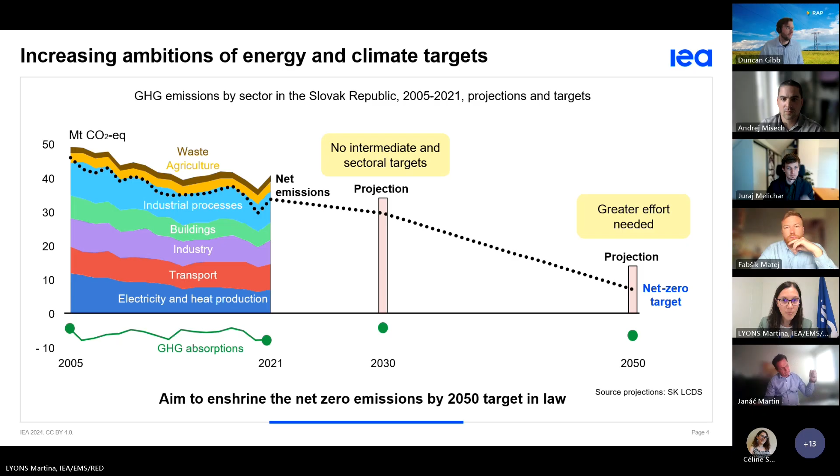So why is that important? Natural gas is a key part of Slovakia's energy mix, making up around 23% of its total energy supply and 8% of its electricity generation. It plays a major role in end-use sectors, covering 41% of energy used for heating and cooling in buildings, and 28% of industrial energy consumption - heating, steam, and feedstock. Slovakia's reliance on imported natural gas creates energy security vulnerabilities.

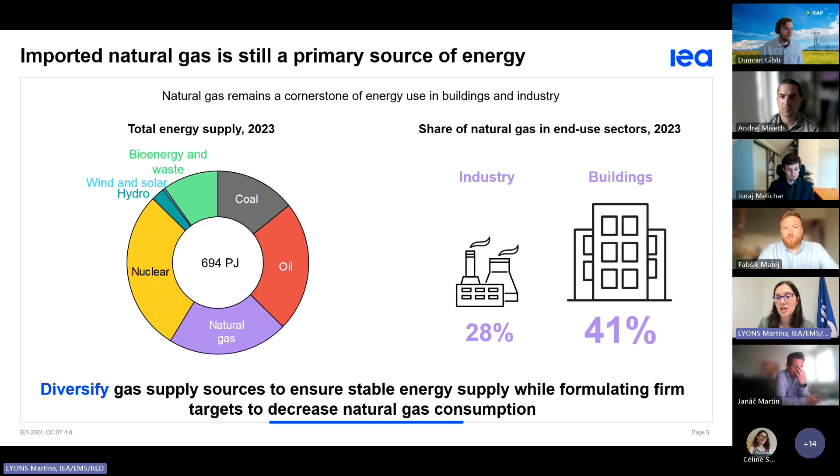Therefore, diversifying gas supply sources is essential to ensure the country has a stable and resilient energy system. This can be done with increased use of renewables, whether it's solar thermal, bioenergy, geothermal, electrification, or even use of nuclear for district heating. Setting clear targets to reduce gas consumption should also be a priority in the country's overall energy strategy.

Slovakia is a quiet leader when it comes to clean energy. Over 80% of its power comes from low carbon sources. Nuclear energy is the backbone of Slovakia's electricity mix, generating around 60% of the country's electricity. The government is doubling down on nuclear, recognizing its critical role in delivering reliable low carbon power. But at the same time, renewables are also slowly gaining ground. Hydropower has been leading the way for years, but Slovakia's solar energy sector has seen a remarkable surge.

It added around 220 megawatts of new capacity in 2023, which came from residential and commercial rooftop systems, which in 2022 was around 60 megawatts. This growth continued in 2024 with 274 megawatts added, and the projection for this year is even higher, around 300 megawatts.

A big part of the boom comes from the Slovak Innovation and Energy Agency's rebate program, which offers subsidies, but this may end in 2026. It also helped to have simplified permitting processes, and due to high electricity prices, it has also prompted some businesses and consumers to invest in solar for cost savings.

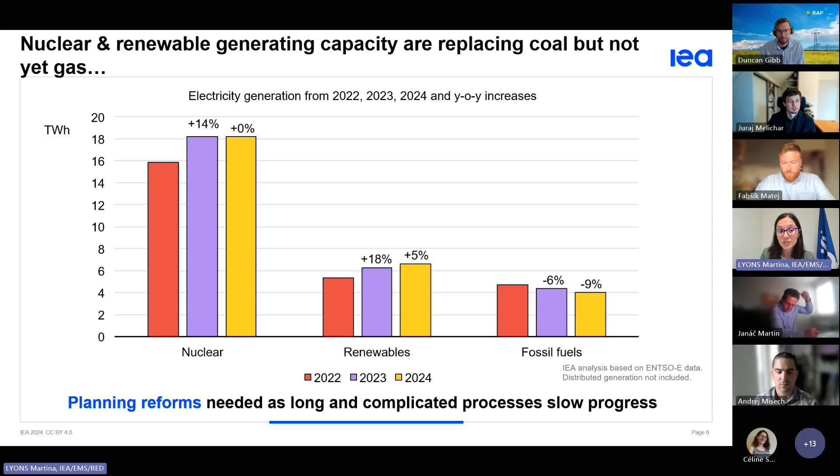So nuclear and renewables are replacing coal, but not yet gas. Why is that? It's because one of the barriers to replacing gas is high electricity prices, which have increased significantly since the energy crisis, being way above the EU average electricity prices.

To encourage replacement or displacement of natural gas with electricity, this is severely constrained by the high electricity-to-gas price ratio, which stood at around 3:1 in both sectors in 2024, for both households and non-household industry. This is actually quite a major decrease from 5:1 for industry and 4:1 for households.

During its review, the IEA found that Slovakia's current carbon taxation doesn't reflect the actual carbon content of fuels, meaning fossil fuels aren't priced in a way that encourages cleaner choices. And this is not just specific to Slovakia, though.

If we want people and businesses to shift to lower emissions, more efficient options, then tax and fiscal policies need to send a much clearer and better signal.

Therefore, a well-designed carbon tax, which reflects emissions, can support renewables, innovation, and efficiencies, and help phase out fossil fuels. I'm saying that because the government actually committed to a fiscally neutral green tax reform, and the IEA encouraged it to move forward with this pledge.

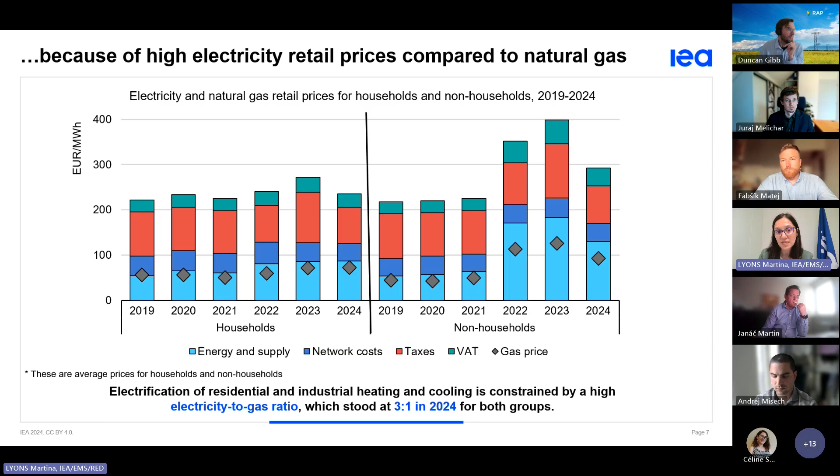When it comes to the building sector, it makes up 39% of total final energy consumption. This is more than any other sector. Energy consumption from space heating makes up 26% of this total final energy consumption.

Over 40% of the demand in residential buildings was supplied by natural gas. This was followed by electricity, bioenergy, and district heating.

When it comes to commercial and services buildings, which are less carbon intensive, they rely mainly on electricity, followed by gas and district heating. I don't want to speak too much about district heating because we have two other speakers talking about it, but it is indeed a widespread supplier of residential and commercial heating in the country.

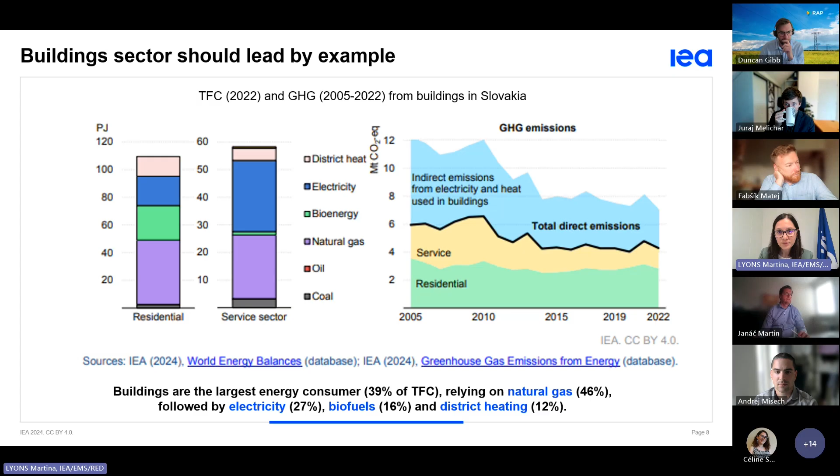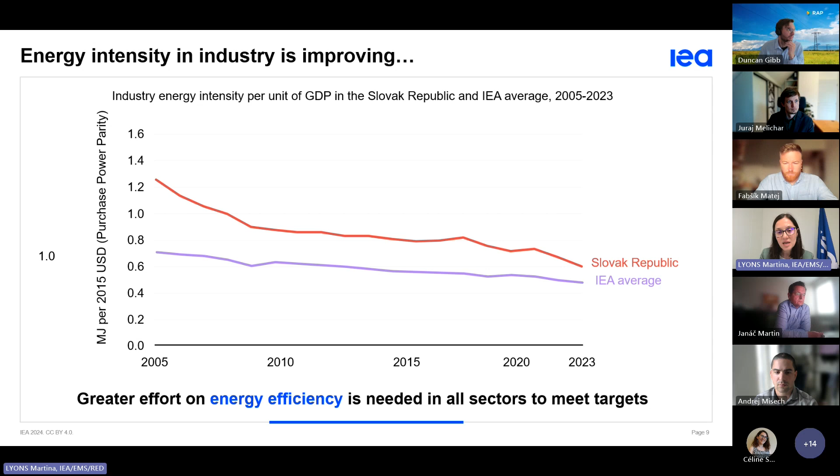When it comes to the industry sector, decarbonizing is equally important for the energy transition as it is for the building sector. The good news is that Slovakia's industry sector has already made some progress, with energy consumption and intensity steadily declining over the past two decades, but there is still untapped potential.

The IEA, in its review, encouraged the government to take a fresh look at all current policies, especially those aimed at decarbonization and renewables, through the lens of energy efficiency and electrification.

Slovakia has undergone a period of deindustrialization, which reshaped the structure of its economy and also contributed to a reduction in energy consumption. But despite this shift, industry remains a big energy consumer, with electricity holding its place as a dominant energy source, but natural gas still plays a key role.

But we noticed that the story lies elsewhere too. Biofuels and waste have been the fastest growing energy source in industry, pointing to gradual diversification and a move toward cleaner alternatives.

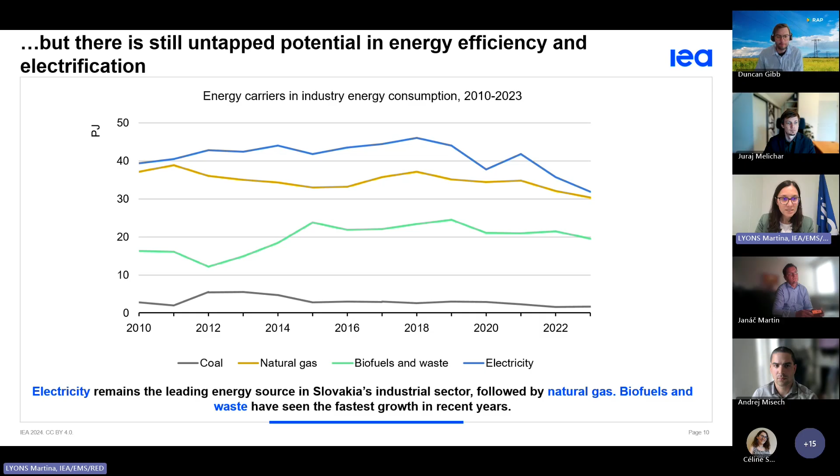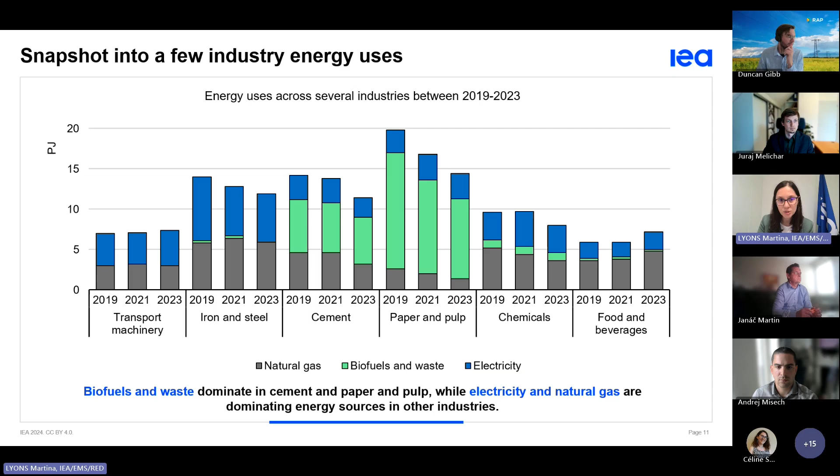On one of the latest slides, it's just a quick snapshot into a few industries and their energy use. The majority is electricity use, followed by natural gas, while biofuels and waste are dominant in the cement and paper and pulp industries.

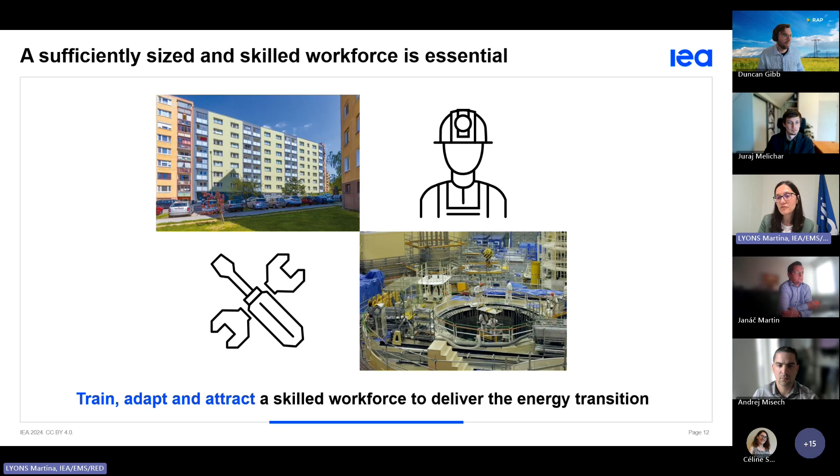In my last slide, I would like to close with saying something which goes beyond technologies and policies and focuses on people. The energy sector is already feeling the strain of a tightening labor market in Slovakia, and the shortage of skilled workers is growing. The government has launched initiatives to tackle these gaps, but what is needed is a more systematic approach, particularly to reskill existing workers, train young people, and attract skilled talent. Investing in people today is essential to deliver any energy system of tomorrow.

These slides offer just a snapshot of Slovakia's in-depth energy report from the IEA, which highlights some strengths, some challenges and opportunities. Thank you, and I look forward to other presentations and to the Q&A.

Thank you very much, Martina. This is definitely a very useful overview of the energy sector in Slovakia and the situation. Now we would go with the second presentation, looking more specifically at the heat pump market in Slovakia.

It will be given by Duncan Gibb, who advises on technologies, policies, and data needed to switch to clean heating. He works at the Regulatory Assistance Project, and he leads their European work on the economics of heat pumps, and has published papers on economics and policy, the Renewable Energy Directive, and cold climate heat pumps. He joined RAP's Europe team in 2022 with more than 10 years experience in energy research and policy analysis. So I give the floor to you, Duncan. Looking forward to your presentation.

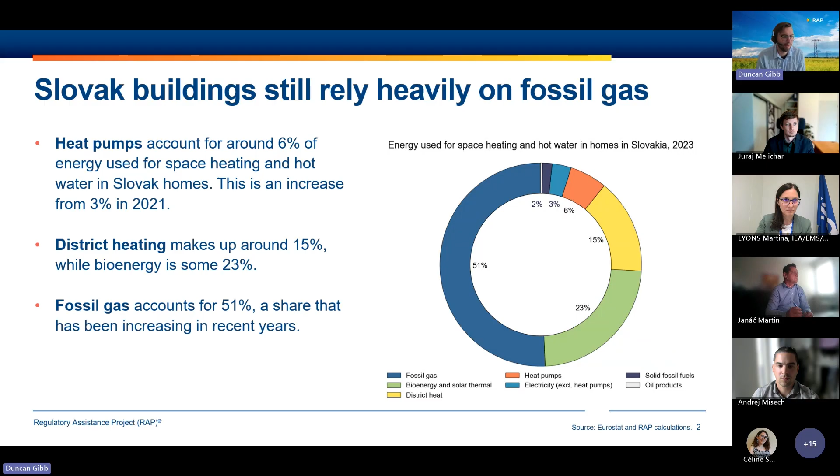Martina talked about this already a little bit, but just to remind you that the Slovak heating sector in residential buildings for space heating and hot water is still heavily dependent on fossil fuels, especially fossil gas and natural gas. We see a slightly increasing role for heat pumps over the past few years in terms of share of final energy in space heating and hot water, but it's starting from a small base, and a bulk of it is still taken up by district heating and by bioenergy as well. We will have some presentations on district heating today too, which I'm very much looking forward to. We've also seen the share of fossil gas increasing slightly in the last few years.

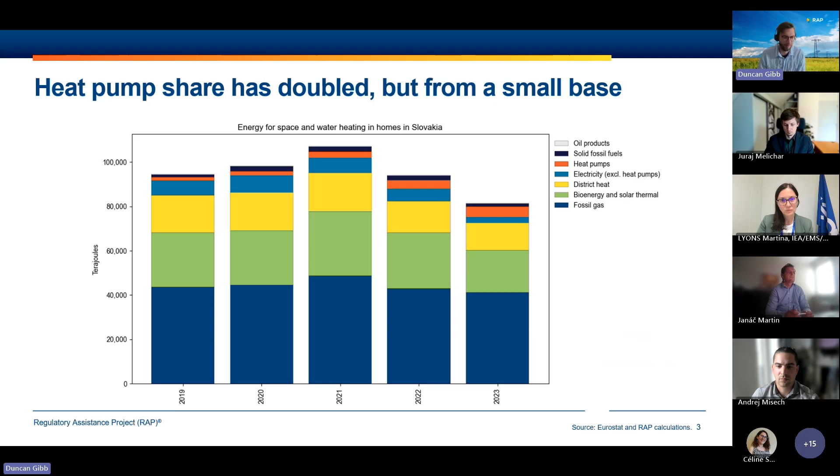Now let's talk more about heat pumps, because this is a lot of what I work on. We have seen a big boom in the heat pump market in Slovakia during 2022. Many of you listening know the reasons why: the Russian invasion of Ukraine, the spike in energy prices, and a big turn across Europe towards heating with heat pumps. This is the case in many European countries, where we saw a big increase in the market in 2022. In the case of Slovakia, it grew by about 2.5 times, and then it started to fall back in 2023. We don't have the Slovak data for 2024, but we can say that across Europe, it has fallen quite significantly.

So this is sort of the context for what I'll talk about today. About a year and a half ago we published a study on the heat pump policy framework in Slovakia. This was based on a toolkit we've published two versions of, in a consortium with Agora Energiewende, CLASP, and the Global Buildings Performance Network, looking at a policy toolkit for global mass heat pump deployment.

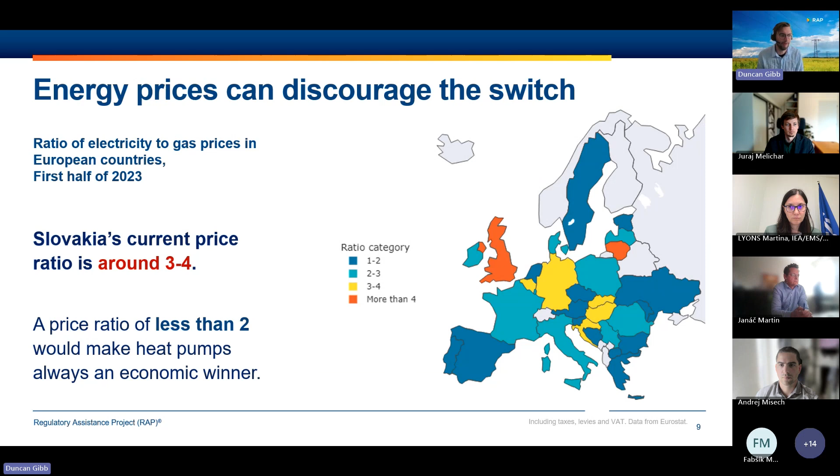So one thing we looked at in this paper, a big message from our paper, is the need to shift these taxes and levies away from electricity and onto gas. Now I'll show you a bit of this analysis to finish my presentation.

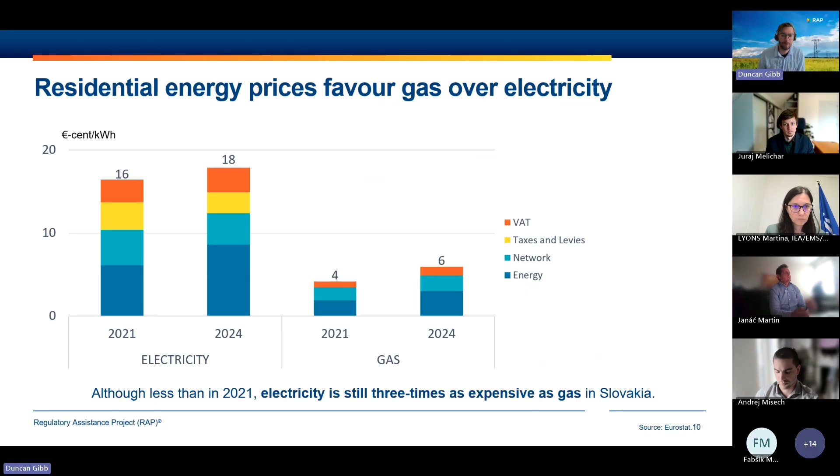You don't want to be placing more government taxation on a cleaner fuel, a fuel you want to be using to decarbonize your heating and lower pollution. This is not ideal, yet it still is the case in Slovakia and many other European countries.

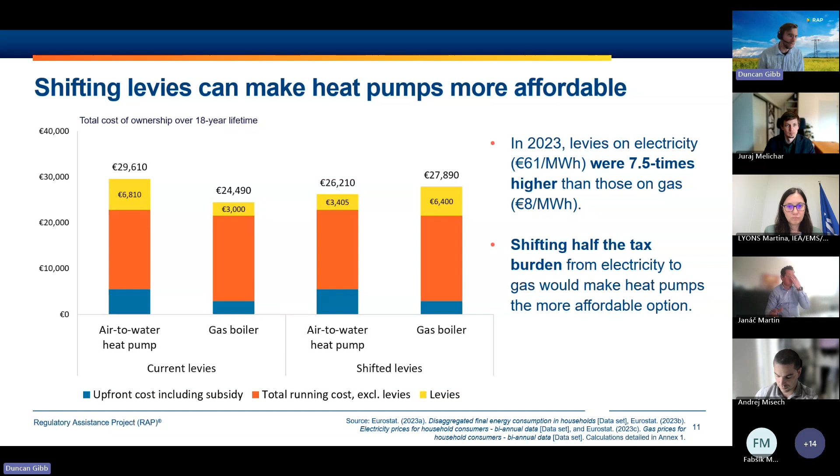One is to communicate with the public. It's really important that people understand the renewable heating technology options. I'm not only talking about heat pumps, but also solar thermal for hot water, district heating. It's really key that households understand these technology options, understand the support available to them and how to access it, and build trust in the technology, because we still hear a lot of myths about heat pumps and other technologies that are simply not true and are pervasive in society, undermining confidence in the technology.

Another one, as just discussed in the previous slide, is to rebalance electricity and gas prices. This is key to make sure that if you're spending a bit more money to invest in a heat pump, which is likely the case because of the upfront cost, you're able to recover that investment in a short period of time.

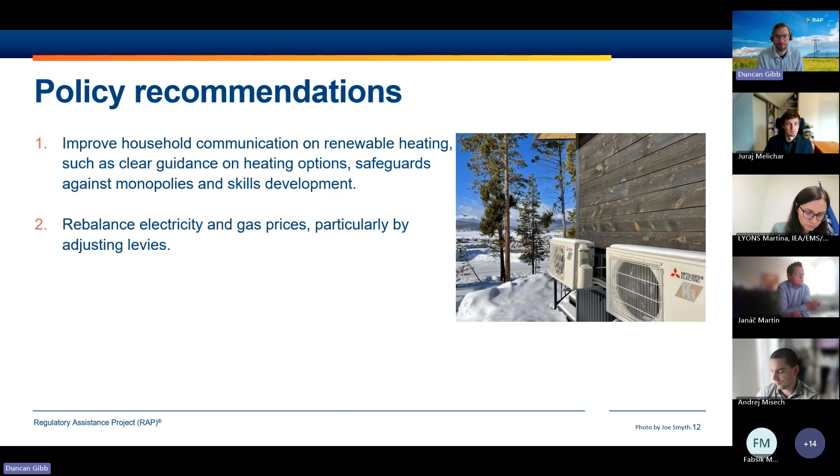Also, we want to make sure that policy support for heat pumps is stabilized. This 8-month gap in funding has been problematic for public perception of support for heat pumps, and it's likely that the support needs to be increased as well, based on the market in Slovakia.

Finally, consider some regulation on the sector, which would be restricting gas boilers in new buildings, largely in line with the Energy Performance in Buildings Directive. Or consider something like a clean heat standard, which would gradually mandate the sale of heat pumps from heating companies - or not just heat pumps, but any clean heating technology - to gradually phase out the sale of gas boilers for new and existing buildings.

So these are 4 of the recommendations I wanted to highlight today in the context of building up a heat pump market in Slovakia. I'm happy to stay around for the panel discussion, and hope that was interesting to everybody. Thanks again to Andrej for the invitation.

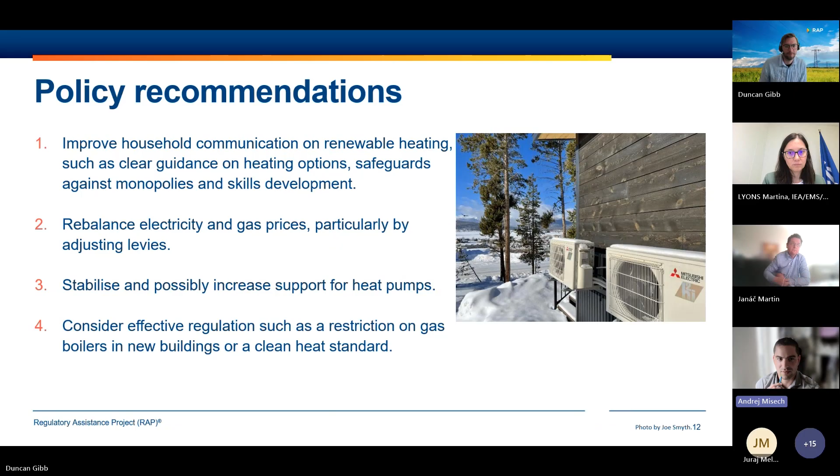Thank you very much, Duncan. Definitely super useful that you included the policy recommendations, and for me personally, the shift for levies point was particularly interesting - something to think about, hopefully.

For the next presentation, conscious of time, we would now go to more practical deployment of technologies in Slovakia. We have Mr. Martin Janáč, who will give a presentation on the transformation of district heating systems in Slovakia.

Martin Janáč has been working mostly for various international companies in the energy sector or their operations in Slovakia. The main focus was on district heating networks, which obviously have a long tradition in Slovakia but need to be transformed into a modern and environmentally friendly solution. During his career, he has been involved in several important district heating transformation projects, from construction of an innovative energy center in Rimavská Sobota using combined heat and power, biomass and photovoltaics, to a unique project installing 18 combined heat and power units in the largest housing estate in Central Europe, Bratislava's Petržalka.

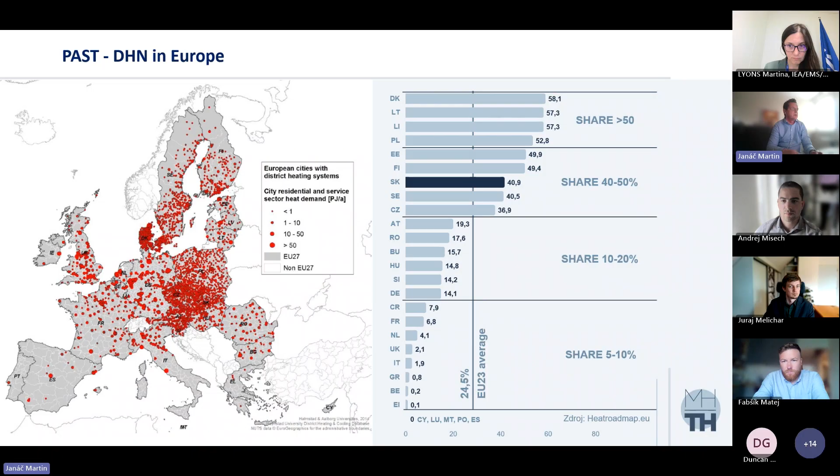Concerning the market in Slovakia, we have district heating networks in nearly every city, supplying heat to nearly 1.8 million inhabitants. The market is quite fragmented with 350 licensed companies, and heating supplies are decreasing. For example, in the last 10 years there was a decrease of more than 25%, mainly due to energy efficiency measures of consumers, but also of heat suppliers.

As stated in the previous presentation, the major fuel in Slovakia is natural gas with a share of more than 50%. This is due to the fact that Slovakia was the major transit country for natural gas to Western Europe. For renewable energy sources, the main part is biomass with a share of nearly 23%.

Concerning price regulation, prices in Slovakia are strictly regulated by the regulators. On the market there are several international players like Veolia, Engie, or Stefe, which is an Austrian company, but also a state-owned company now called Teplárenský Holding, where I worked, which regroups the district heating companies in major cities.

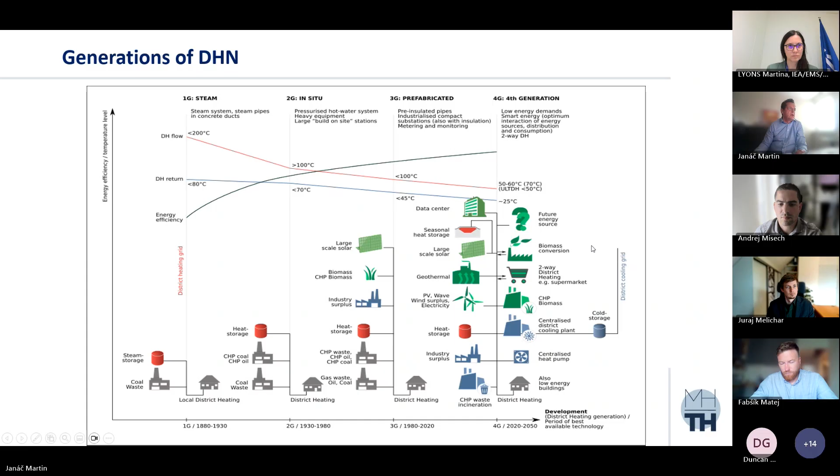This will be done by the development of renewable sources, which are mainly based on biomass, geothermal energy, and waste heat from industrial production.

One part will also be the integration of waste-to-energy plants into district heating networks. We are already using this waste heat from these waste-to-energy plants in our two biggest installations, but we plan to increase their share.

Further development we see also in high efficient combined heat and power, which is in fact a flexible tool for the stabilization of the electricity grid as a consequence of renewable energy installations into the grid.

We can observe on the market that with the installation of renewable sources, there is a big fluctuation in prices of electricity, and district heating networks with combined heat and power can bring the stabilizing factor to these tendencies, and can very well complement renewable energy production.

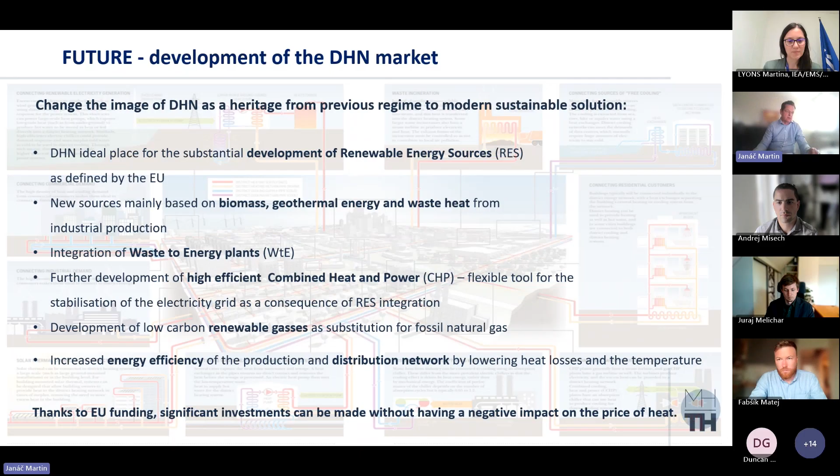So just a few words about our company, MHT Teplárenský Holding. MHT Teplárenský Holding is quite a new company, which was created only in May 2022 by the merger of six biggest

state-owned district heating networks, and is nowadays operating as a single company. The reason for the merger was mainly to make the operation more effective, to centralize some services, and in the end to optimize and reduce the price of heat for final customers.

These are just a few figures about the different sites that we operate. Just to have an idea, MHTH supplies nearly 2,400 gigawatt hours of heat and 600 gigawatt hours of electricity. The total length of the distribution network is more than 500 kilometers.

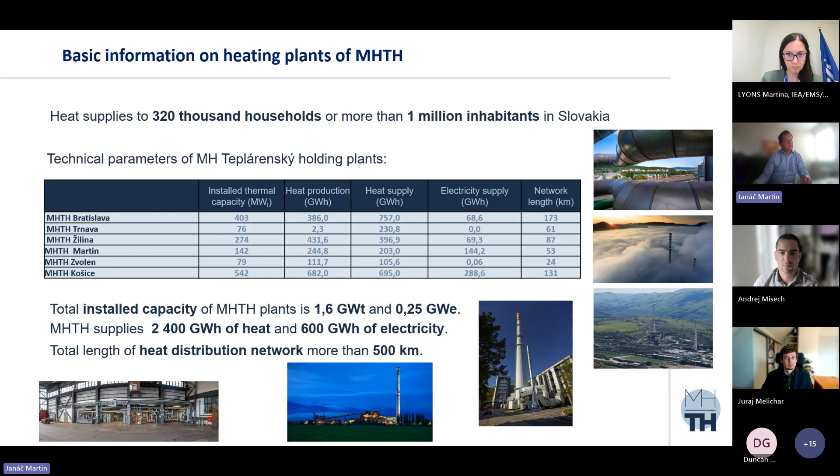Coming back to legislation, European Energy Efficiency Directives define for us the goals, defining the so-called efficient, or maybe better said, sustainable district heating network, where the share of renewable energy sources or waste heat is defined, and these minimum shares are getting stricter and stricter.

There is the possibility to use also the heat from combined heat and power until 2040, in combination with waste heat and renewable, but at the final end to arrive in 2050, where only renewable heat or waste heat can be used.

Member states may also, based on this EU directive, choose an alternative criteria which defines the amount of greenhouse gas emissions from the district heating and cooling system per unit of heat or cold delivered to customers. So nowadays the threshold is under 200 grams of CO2.

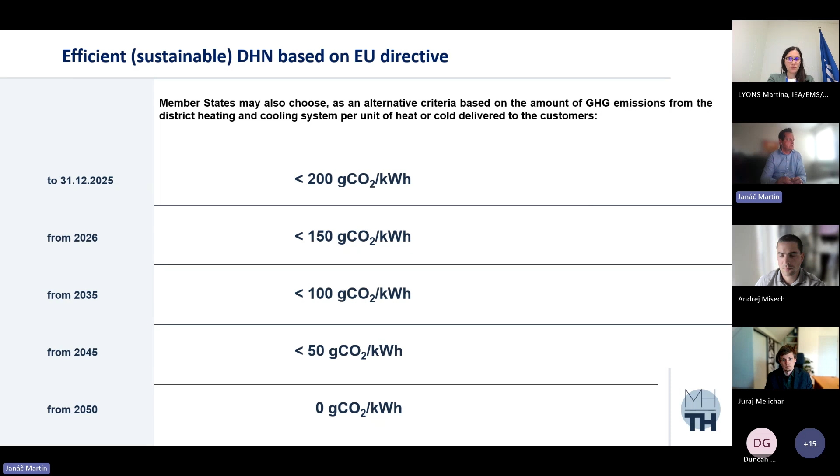And the final goal is to have zero emissions in 2050.

Concerning concrete projects that are already realized or planned in our operations, I have it broken down by different sites, because there is no single silver bullet solution to these challenges. Heat is a local topic, and every city has a different context and also a different solution which can be adapted.

So for Bratislava, we plan to continue with CHP production from natural gas, maybe in the future replaced by low carbon gases, and increase the share of heat from the waste-to-energy plant.

Trnava is a specific case where we use emission-free heat from a nuclear power plant. On this site, we are using less than 5% of natural gas as a backup solution in case of maintenance of the network.

In Žilina, we are still using coal in this plant, but in a few months and next year it will be replaced by natural gas combined heat and power. We are also considering the use of a multi-fuel boiler which can use wood chips, so biomass, or RDF, which is treated waste.

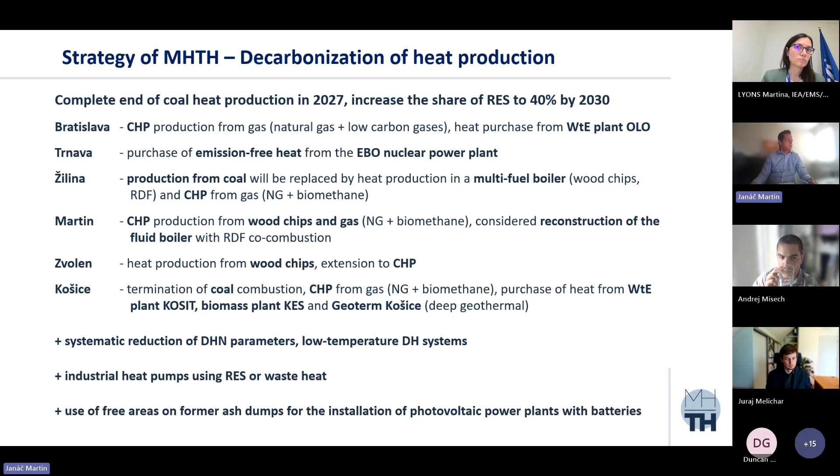Finally, the Košice plant, which is also our biggest site, located in the eastern part of Slovakia, where we are still using coal, but we invested in gas CHP, and we plan to increase the share of waste to energy from the Kosit company. We are still buying some heat from a local company, and we have a big project, Geoterm Košice, which I will describe in my next slides.

The second part will be from burning sustainable biomass, which will stay at, let's say, a constant level. The drawback of using heat pumps is that from an electricity producer, we will switch more to an electricity consumer.

But we see the opportunity, especially in the flexibility of operation, where we have the possibility to switch between CHP production of electricity and using heat pumps in periods where the price of electricity is low, even negative. We could use heat pumps to produce cheap heat. But at the same time, when the peaks of electricity happen, when renewable electricity is not produced, we can switch back to CHP production and benefit from the highest prices in order to have a competitive price of heat.

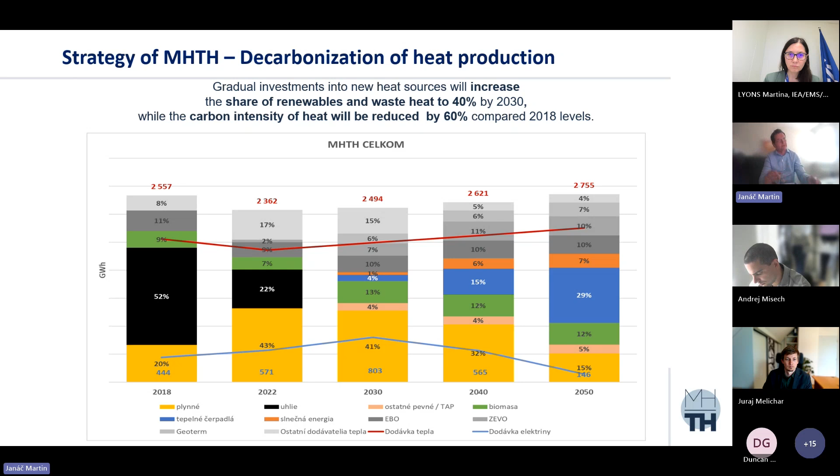The plant in Bratislava is comparable in size to the Košice one, but we are producing much less electricity because we are buying a lot of heat from external producers. The difference to the Bratislava site is that in Košice we are supplying most of the heat to an external distributor, a municipal distribution company, which then supplies the heat to final customers.

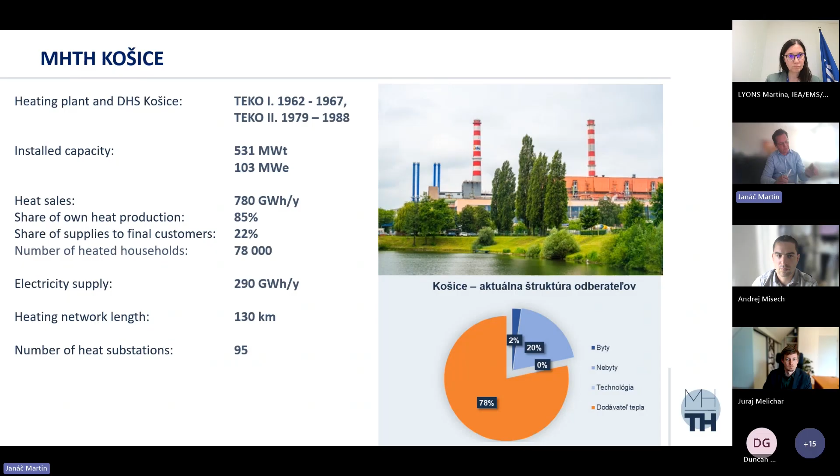So coming to the Geoterm project: the positive thing is that the reservoir in the Košice basin is considered one of the most promising in Central Europe, with an estimated potential of 200 megawatts.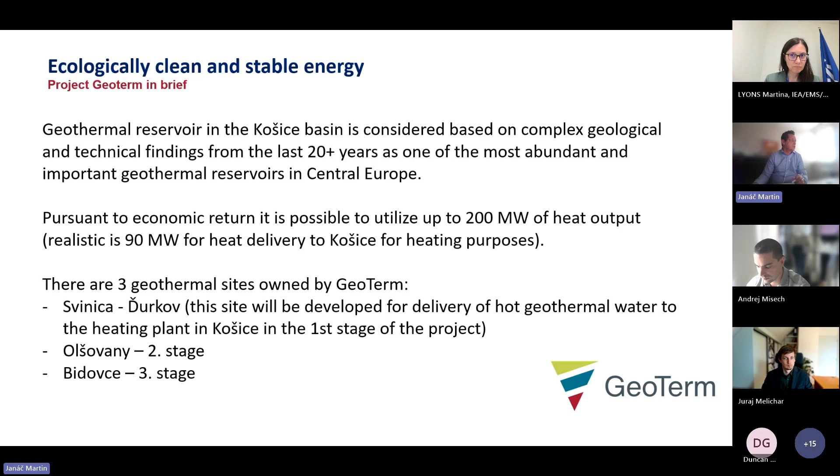But for our project, we see a realistic maximum at the level of 90 megawatts of heat delivered to Košice city. There are 3 geothermal sites owned by the Geotherm company, which is an SPV company dedicated to the production, exploration works, and underground work. The sites are in Svinica, Ďurkov, Olšovany, and Bidovce.

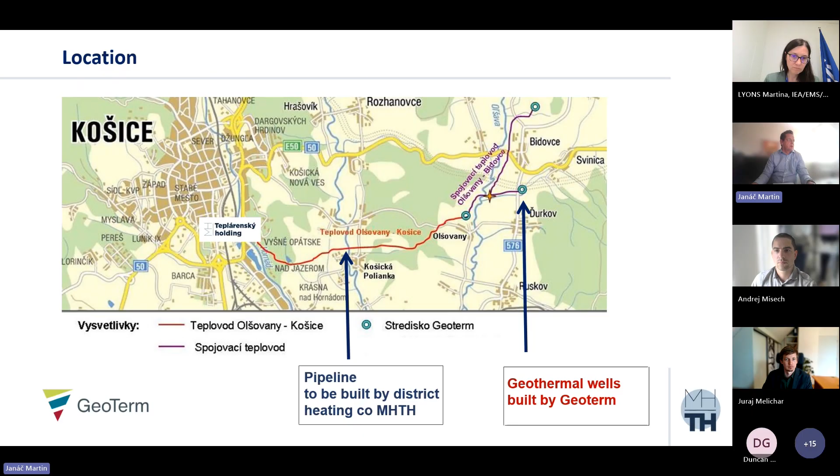Geothermal wells are built by the SPV company Geotherm, so we will have a long-term agreement with this company for buying heat from their production. So for the project at its current stage, we have all the permissions needed for construction. We have a valid EIA.

We have also the legal company Geotherm, which has legal title to all land for the planned 3 geothermal sites. And we have also managed to have the agreement of all the landowners where the pipeline will be built, and we have all the building permits relevant and valid.

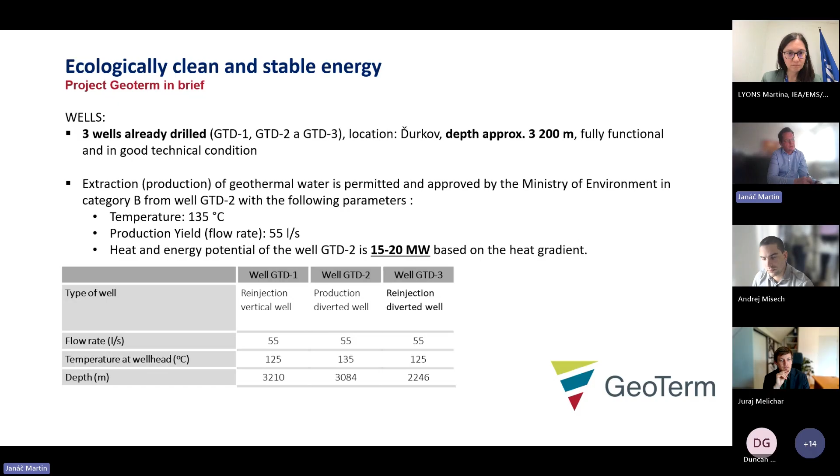Few figures about the wells. There are actually 3 wells already drilled at the location Ďurkov with approximately depth of 3,200 meters. These wells are 2 reinjection wells and 1 production well. In the first stage of the project, we plan to build 3 other wells of one production well and 2 reinjection wells, and this will be then with the capacity of roughly 30 megawatts, with the potential to increase to 90 megawatts in total.

The goal of the project is delivering clean heat from geothermal wells to district heating of Košice. As I said, 30 megawatts, possible to upgrade to 90 megawatts. It's a strategic project for us to decarbonize the heating in Košice and completely stop the production from coal until 2030.

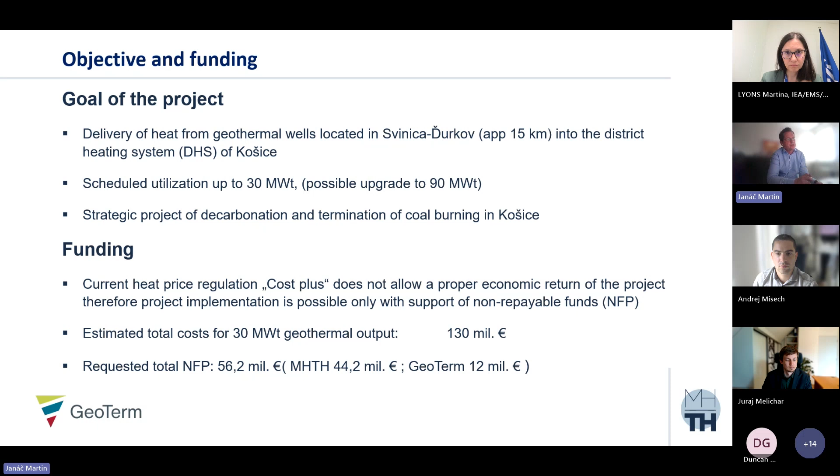The estimated total cost for the first phase of the project is roughly 130 million. We have already obtained financing from the Just Transition Fund of EU funding at the level of 56 million, which is distributed for the network from our side, MHTH, and for Geotherm for the drilling of 3 additional wells.

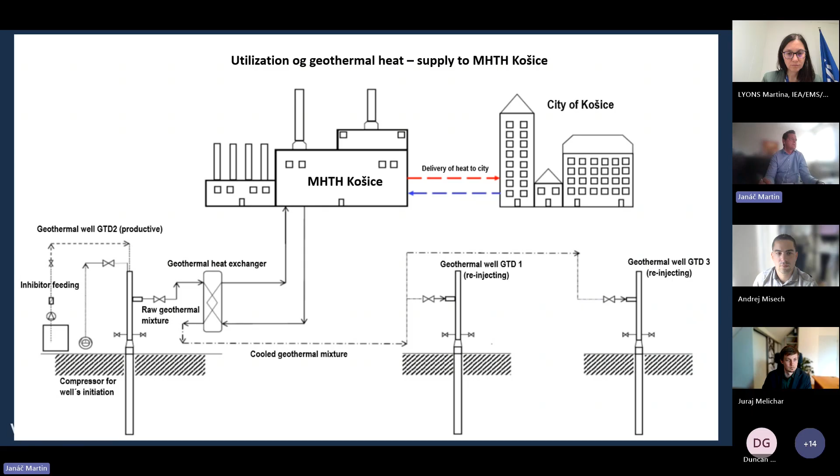This is a small scheme where the reinjection wells and the production wells are displayed. The circuit with geothermal water is closed, so we have the exchanger which will use the heat, then different water will circulate in the pipeline to bring it to our side in MHTH Košice, and then we will use our network in the city to distribute it further to citizens in the city of Košice.

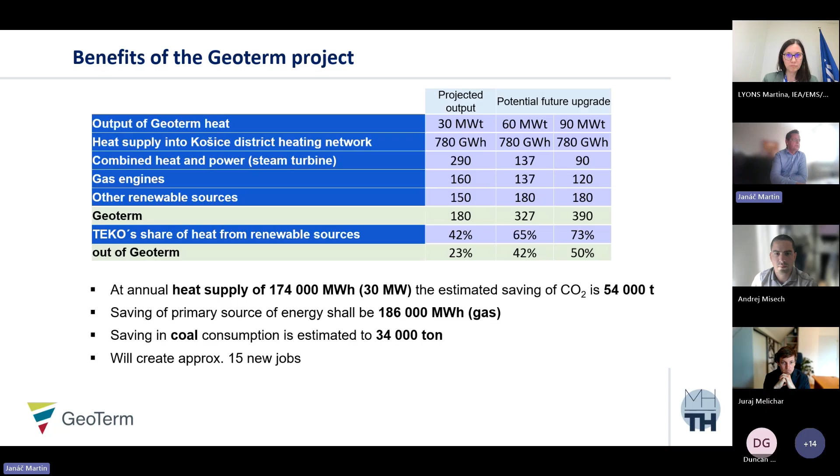These are the few figures with the project output for the 30 megawatt, 60 megawatt, or 90 megawatt alternative. We can see on the 2 last lines that depending on the alternative, the share of renewable heat can increase from 42 to 73%, out of which 23 to 50% can be directly supplied from Geotherm.

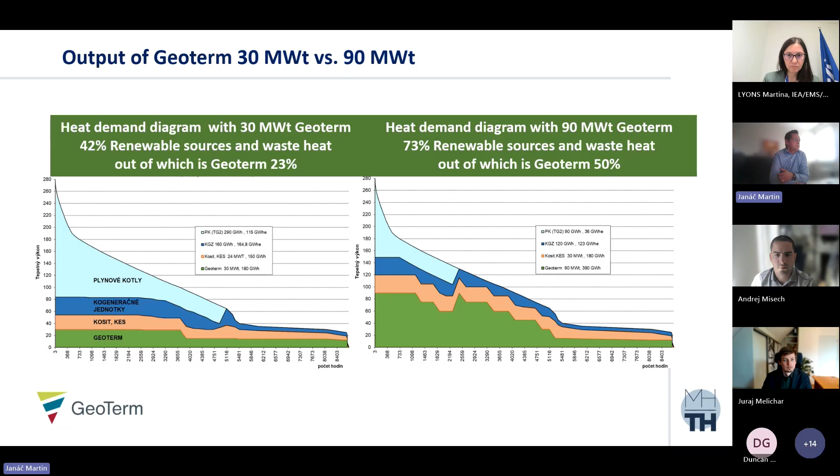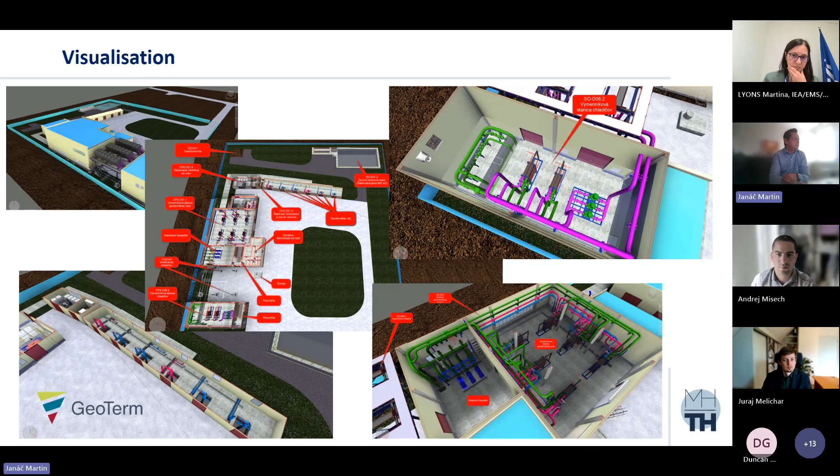And yeah, this is my last slide. So it's very difficult to predict how the future will look like in 2050. Also, Marty McFly, when he was traveling in the future, he was traveling, in fact, to 2015, which we already passed, and the imagination of that time didn't fulfill 100%. So it's very difficult to say how 2050 will look like, but I'm sure that district heating networks will play a key role in the supply of heat to citizens, and we have all the cards in our hands, and we have to do our best to maintain this technology also for further generations. Okay, that's it, and thank you.

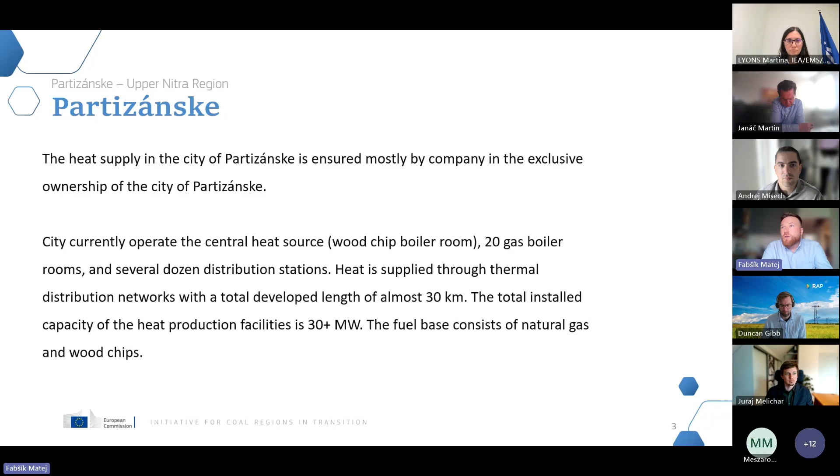Also a huge problem for now is that the system is strictly decentralized. That means we have more than 20 boiler rooms in the city - smaller district heating systems - and more than half of these boilers are in a state of disrepair, meaning they can maybe produce heat for not more than 5 or 10 years. So we don't have much time, and we need to focus on reconstructing this system.

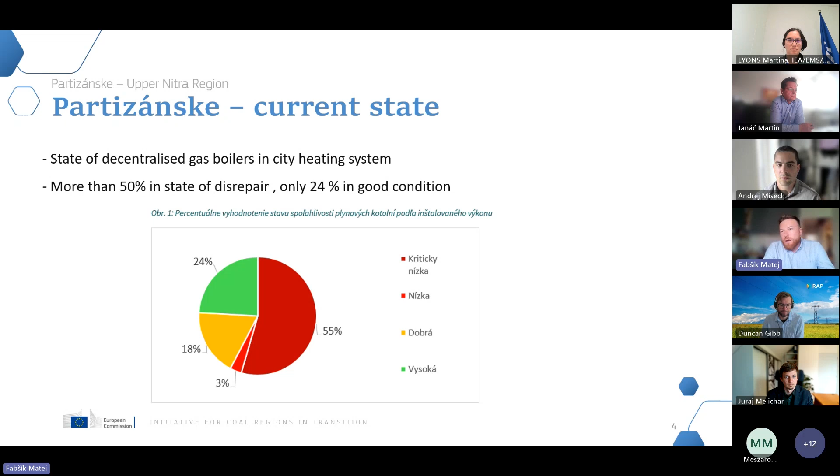Only a quarter is in good condition, but we have some kind of solutions. I'm also part of Friends of the Earth NGO, which is supporting the city. I'm not part of the city, but we are supporting it, preparing feasibility studies and plans for how to decarbonize effectively and how to keep the price sustainable and competitive in the city.

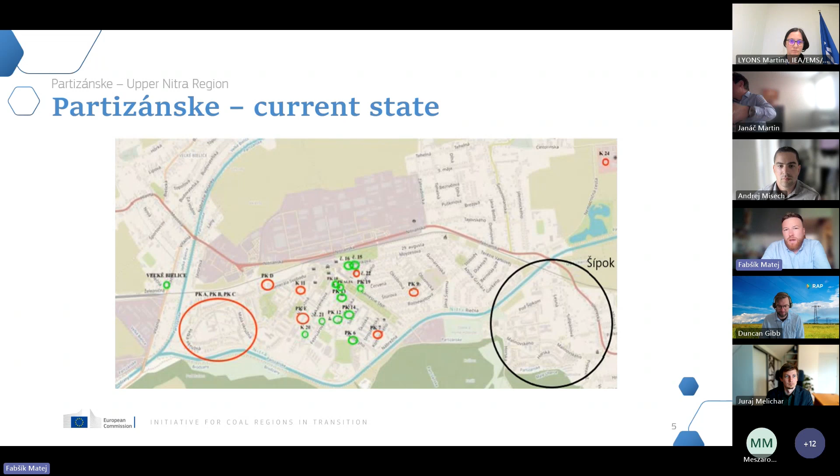If we think about how we can produce heat when it is most advantageous, not just when it is needed, we definitely need to interconnect these systems, because we have overcapacity in biomass in one part of the city - more than 5 megawatts - and nowadays we have less than 25% of heat production from biomass. So if we take the first step and interconnect the systems, we can achieve more than 60 or 70% from biomass.

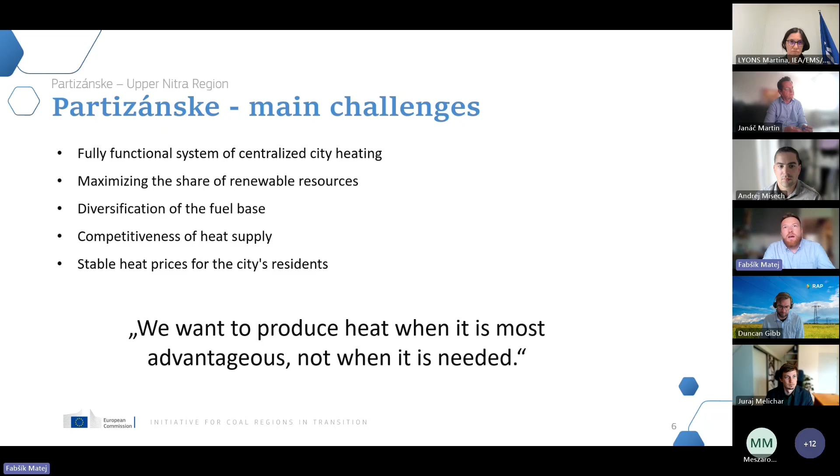But we have another advantage too, similar to Košice, but not so hot. We have 2 geothermal drills, and one is not so deep - one is 33, and the second one is 23 degrees Celsius.

And that means that we definitely need heat pumps to heat the temperature and utilize it into the system of district heating, because we are planning the 4th generation centralized system, and it means the maximum temperature at about 65-70 degrees Celsius. I think it's a good opportunity to have also this kind of geothermal energy.

We have a lot of activities planned about geothermal energy, but we are still waiting for the ministry, because we are also part of a coal region, part of the Just Transition Fund area, and we are waiting only for results. We have applied for research activities for geothermal energy, and we are now waiting 6 months only for results, planned somewhere in February. So the really big problem is bureaucracy in Slovakia, and we need to focus on this too, but I don't know exactly how.

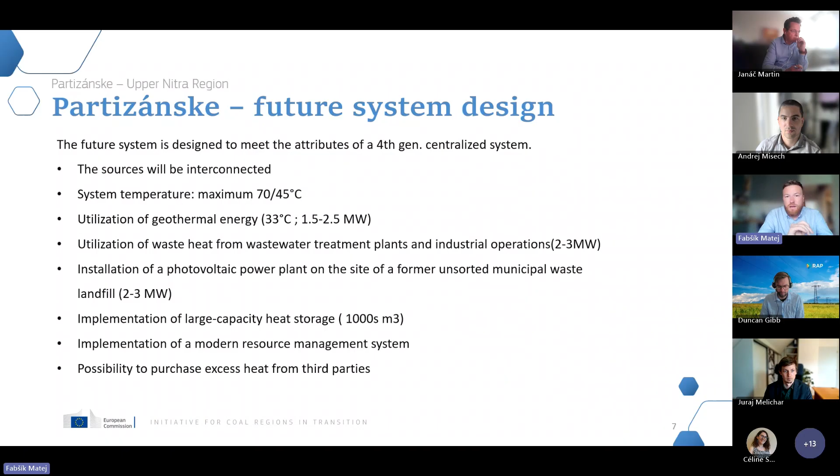We are planning the geothermal energy also as a base load, so it's logical, I think, and we want to store the heat, as I said before. We are planning to build a medium or large capacity heat storage, more than 1,000 cubic meters, and that means we can really cut the peaks during the day, and we can make more than 50% from geothermal energy that is not more than 2 megawatts. We can make this in the city because it will be a base load with also heat storage, with huge or industrial heat pumps. We can make this kind of mixture.

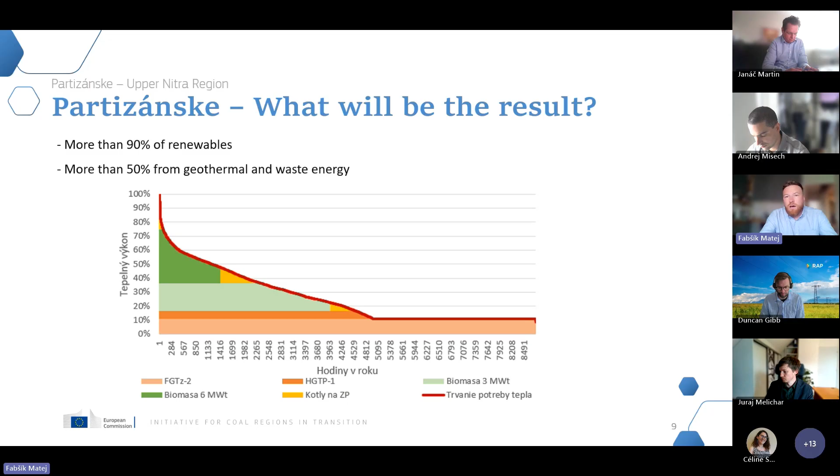We have a similar project with Žilina University, a research activity in a wastewater treatment plant, and we are also planning in the future to utilize waste energy from industrial processes, mainly from the wastewater treatment plant, because we have stable temperature on the outflow, and that means it could be utilized mostly during the winter, with quite hot water if we use heat pumps for wastewater treatment, utilizing the wastewater into the system. During the summer we will probably use the river water, because its temperature is more than 5 degrees Celsius hotter than the wastewater.

And what about the financing, when and how much? I think the first phases could be done within 5 or 10 years, depending on funding, ministry, and bureaucracy, and also depending on budget, because this kind of solution is still more than 20 million in total.

But we are trying to focus on every opportunity we have. We are now successful in the EU City Facility Program, successful in the target program from the European Investment Bank, and we have strong communication with partners in the European Urban Initiative. So we are also focusing on direct funds, not only Slovak regional funds, and we hope that co-financing will be somewhere around 50%.

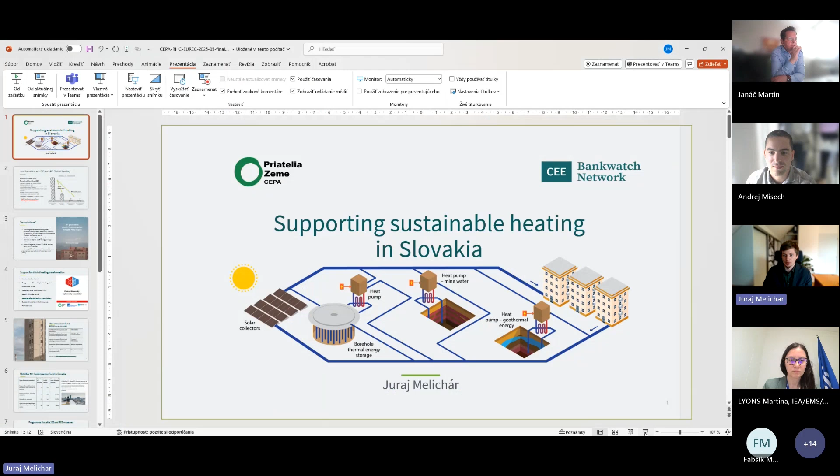Maybe I will start with the fun fact that Peter von Rittinger, one of the constructors of the first heat pump, studied in Slovakia, in Banská Štiavnica. So I think sustainable heating is very much connected also to Slovakia, and we would like to see really also to reinvent this tradition.

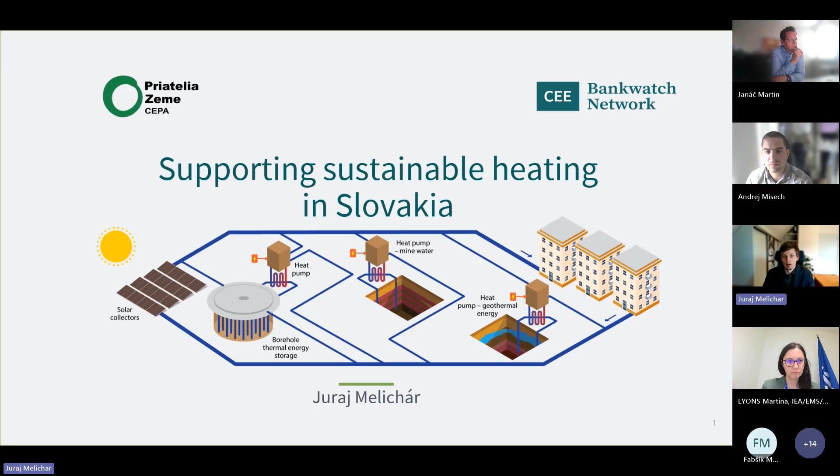We started working in Friends of the Earth on sustainable heating around 2018, when it was one of the preconditions for just transition, or basically decommissioning of the coal power plant Nováky in the Prievidza just transition region, where the town Partizánske is also situated.

We prepared a comparison of the third and fourth generation district heating, where you can see on the right side that the coal power plant Nováky, which was decommissioned in December 2023, had a certain amount of annual CO2 emissions. One of the best solutions we have in Slovakia was to decrease, with approximate business-as-usual solutions leading to a 73% emission decrease. Our pre-feasibility study showed that with much more energy efficiency of buildings and modernization of the district heating network, there could be a fourth generation district heating system with 97% less emissions.

Nevertheless, Prievidza now has the largest heat pump in Slovakia, using underground mine water. It's 4 megawatts and it's heating the town. There is also a thermosolar system for preheating the mine water, which, as I heard, is more efficient than they predicted, and they are more happy than they used to be when they were planning it in advance.

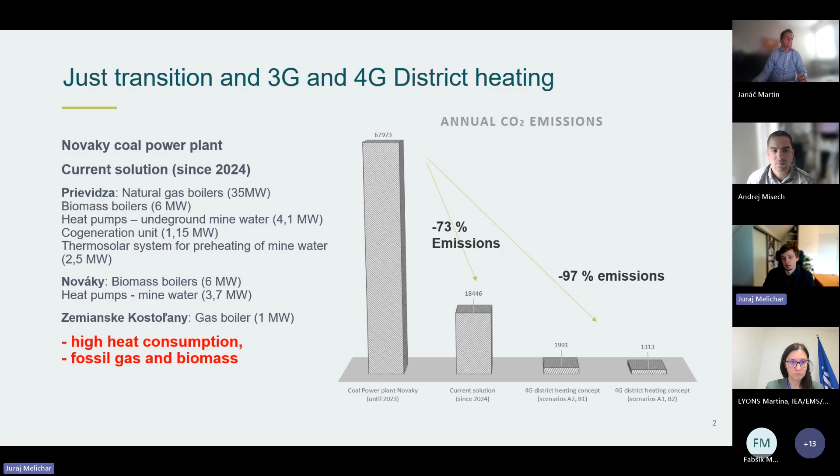There is still a lot of fossil gas and biomass in the system, and also in the whole country system. Therefore, we really recommend a second phase, which shows that modernization of the heating pipelines still has another 11% energy savings potential, and renovation of buildings in the town of Prievidza shows further energy savings are possible. To sum up, in theory only 46% of the heat would be needed with a low temperature district heating system, compared to the very inefficient coal power plant district heating system, which was very big, with for example 12 kilometers of heating infrastructure to those cities.

So this was our initial work, and then we started focusing more on Partizánske because there was much higher potential and willingness to make further steps.

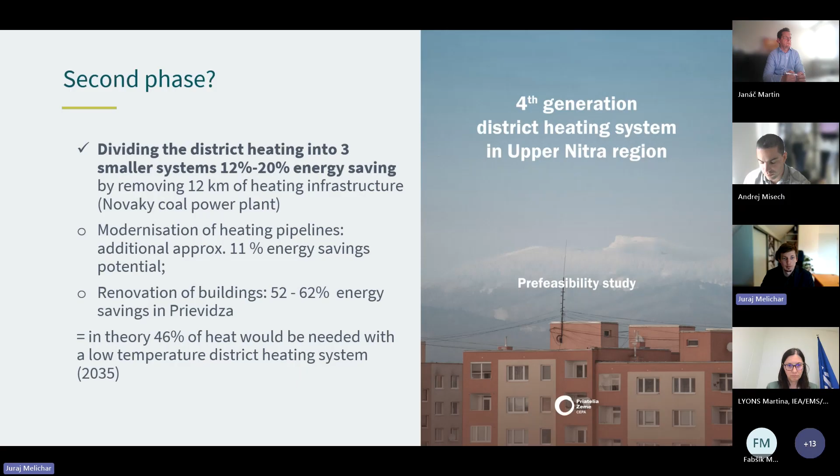Our work also concentrates on identifying and improving opportunities in public financing, mostly EU funds. For example, approximately 15 billion euros are allocated to decarbonization of energy in this decade by 2030. The Modernization Fund, Program Slovakia, including the Just Transition Fund, and the Recovery and Resilience Plan also have some measures, for example passportization of geothermal wells. There is a Social Climate Fund with a possible allocation of 1.6 billion euros, which hopefully will be approved with the ETS2.

With the Czech Technical University in Prague and the Center for Transport and Energy in Czechia, we started the Czechoslovak Heating newsletter, so I would like to invite people to subscribe to receive some news. Our NGO is also supporting pilot initiatives, for example in Partizánske and other towns and cities where it makes sense.

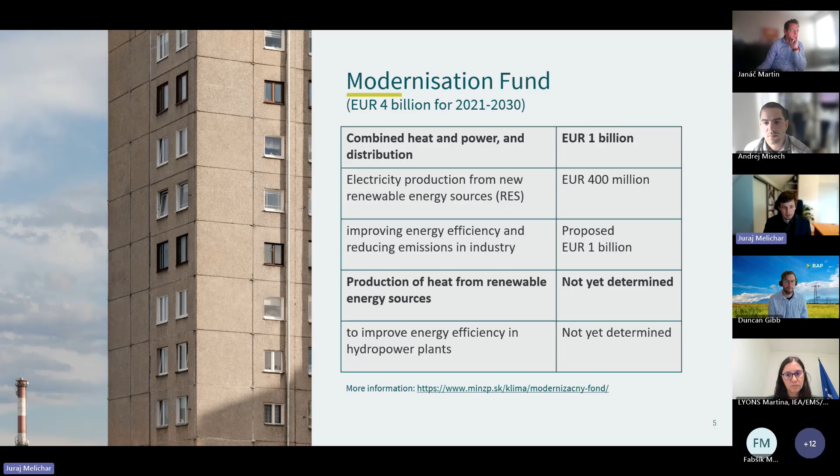With the CEE Bankwatch network, we did an analysis of Modernization Fund spending. In Slovakia, the allocation is roughly 4 billion, and more than 1 billion is allocated for combined heat and power, distribution, and district heating in general. We hope that money would be used more for renewable heating and cooling and energy efficiency measures.

Our analysis of 32 projects financed from the Modernization Fund in Slovakia shows that out of 116 million euros used for district heating projects, approximately half is used for fossil gas.

So we think that it's unfit for 55 to still support fossil gas infrastructure. We have roughly 23% of allocation to biomass projects and almost non-existent investments in other renewable energy sources, which is very worrying. It shows how underdeveloped the district heating market in Slovakia is, and how it still supports false solutions like fossil gas, unsustainable biomass, and waste incineration.

There is also a program, Slovakia, which supports energy efficiency measures, creating capacities for regions and other promising areas. For example, there is the program Green to Households with an innovation, Green Solidarity, as Duncan was recommending, to have more focus on low-income households. The Green Solidarity program now aims to innovate the Green to Households program with conditions for lower-income households to have better financing. There are also some measures for promoting, prospecting, and surveying geothermal energy sources, and so on.

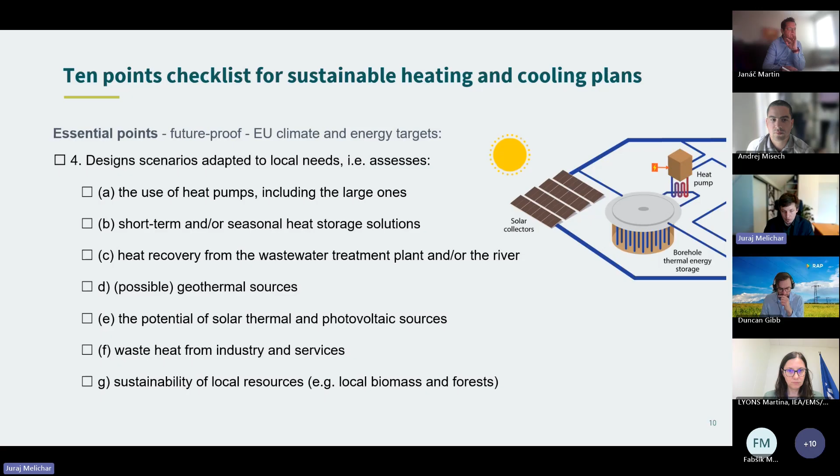Other district heating systems from Denmark or even Czech Republic could show how to proceed with district heating transformation. Sometimes I think we don't need a crystal ball to look into the future. We can just travel, or we don't need to do excursions to travel in time - we can just take people to Austria or Denmark or Czechia.

These are the elements we would like to incentivize and motivate municipalities to think about, such as energy efficiency improvements, for example cascade systems in district heating, where some better buildings can allow lower temperature heating, or using flexibility options and taking advantage of low electricity prices, also participatory discussion with stakeholders involved, and so on.

To sum up, I agree with the people presenting before that fossil gas is very much supported. Slovakia has spent billions of euros subsidizing energy, which led to a very bad situation in terms of the electricity to gas ratio, and also energy savings were very low compared to Czech Republic.